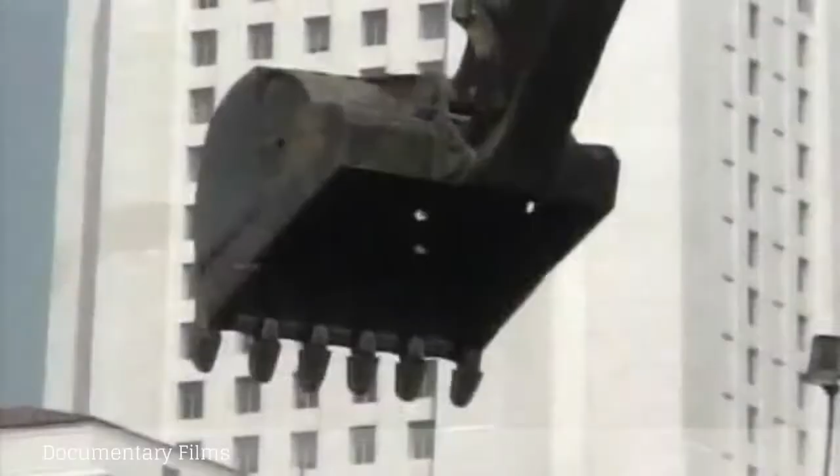For the past year, 8 months, and 20 days, the builders of the new California Department of Transportation headquarters in downtown Los Angeles have been busy pouring concrete, erecting steel, and installing walls and windows. The massive 750,000 square foot office building looks almost completed from the outside, but the structure is still pretty naked on the inside.

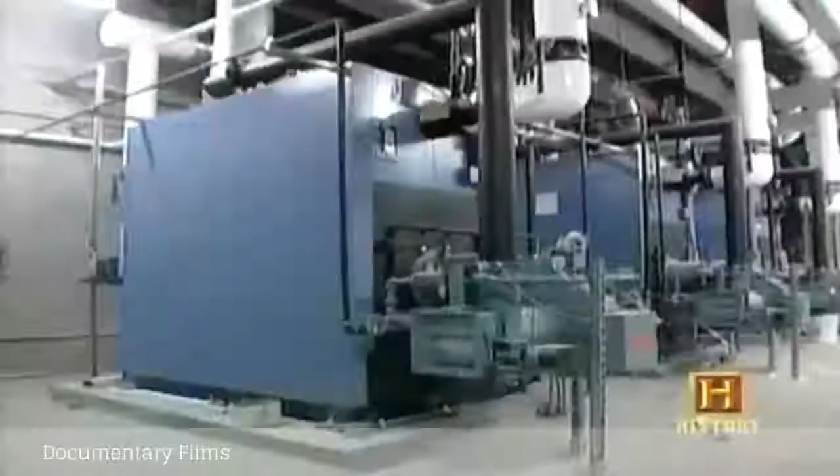It'll take another 7 months to finish installing the heating, ventilation, and air conditioning system, and elevators. These are the things that make working in a large office building possible, even bearable.

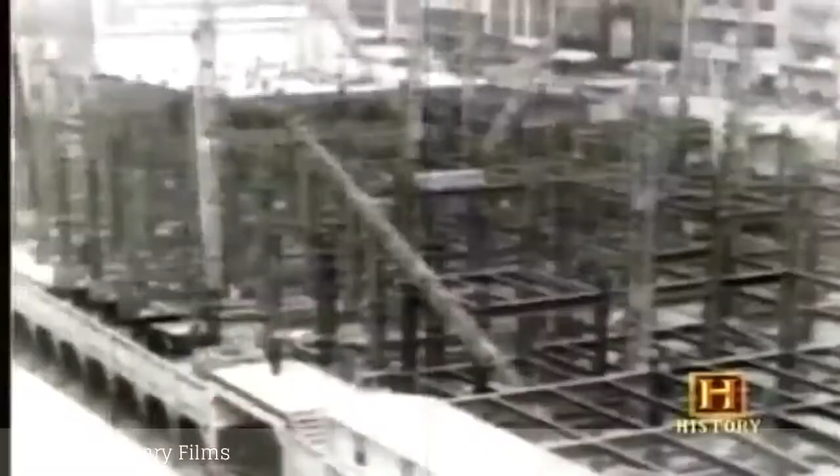Beyond the introduction of steel cage construction, no invention helped buildings, including our own, climb higher than the elevator. If we did not have passenger elevators, we don't have the modern multi-story office building, because people won't walk more than 2 or 3 floors off the street to easily reach an office.

The Caltrans building will have 19 elevators to shuttle its 2,000 employees to upper floors. Kone Incorporated will soon begin installing them. But in the meantime, Clark Construction is running a temporary man lift to move workers and materials.

At the helm, Bobby Jeffers, man lift operator extraordinaire. This is a man lift operator's life - you're always getting loaded and you're always having your ups and downs. I've been running the man lift for 25 years all over Southern California. I've built hundreds of buildings. I'm the main person that brings everybody up. The job won't run without me.

The site uses an operator for a more efficient flow of materials.

Okay, if I take you down, can I get a nice smile out of you guys? Going down, okay, you ready? Okay, hang on, hang on baby.

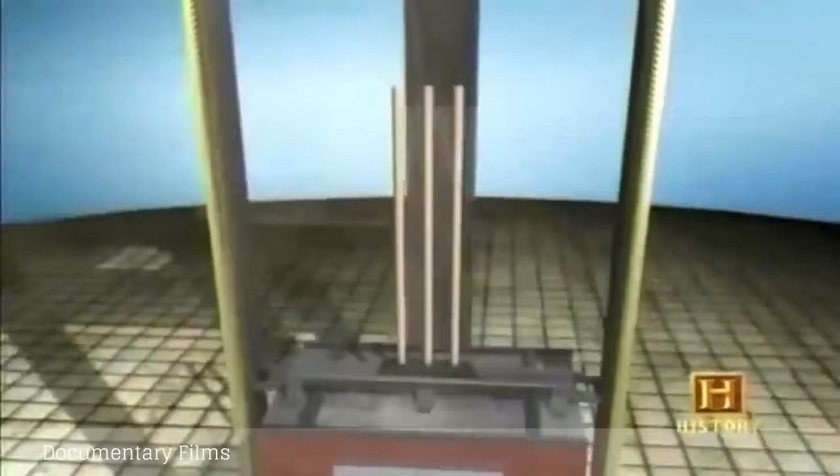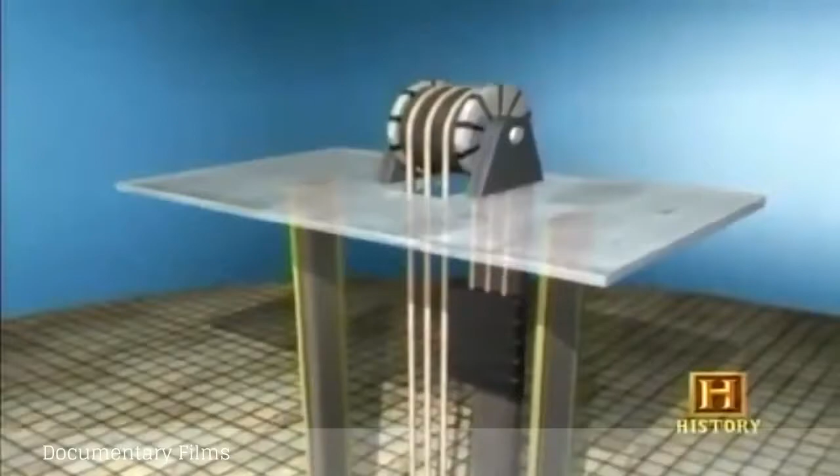Like most of the elevators used in high-rises, these are what's known as roped traction elevators. This is the elevator car. Cables are attached to the car, go up to the top of the shaft, and then over a pulley or sheave, and then back down the shaft to a set of counterweights that balance the car. Attached to the sheave is an electric motor, and when it operates, it turns the sheave or pulley, and then the car goes up or down the shaft.

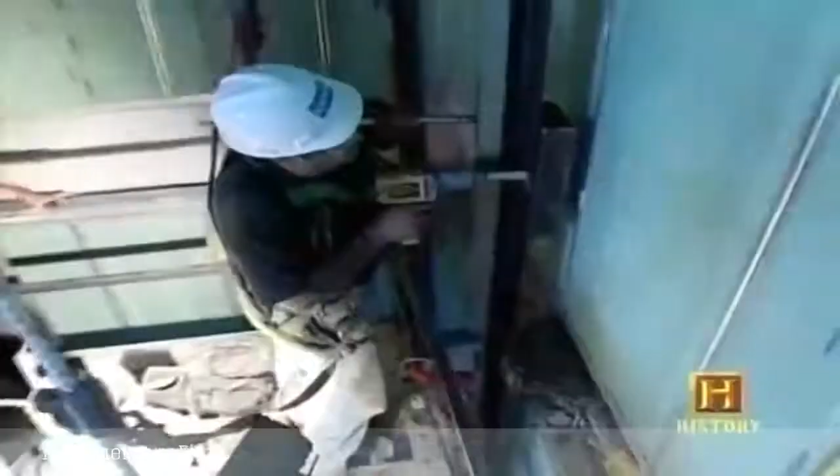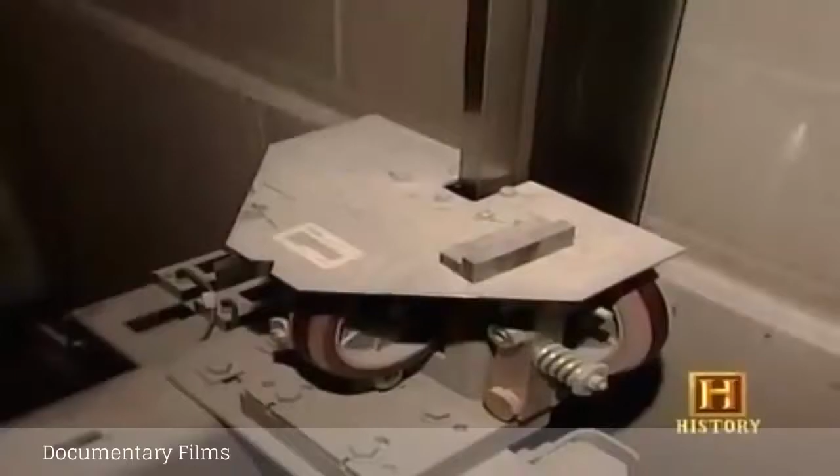Crooked in the rail. The faster the car travels, the more you'll feel it. These cars travel 500 foot a minute. It's not a real fast car, it's not real slow, it's kind of in the middle.

Electric traction elevators are the most prevalent. They're called traction elevators because it's traction between the motor sheave and the cables that lifts and lowers the car.

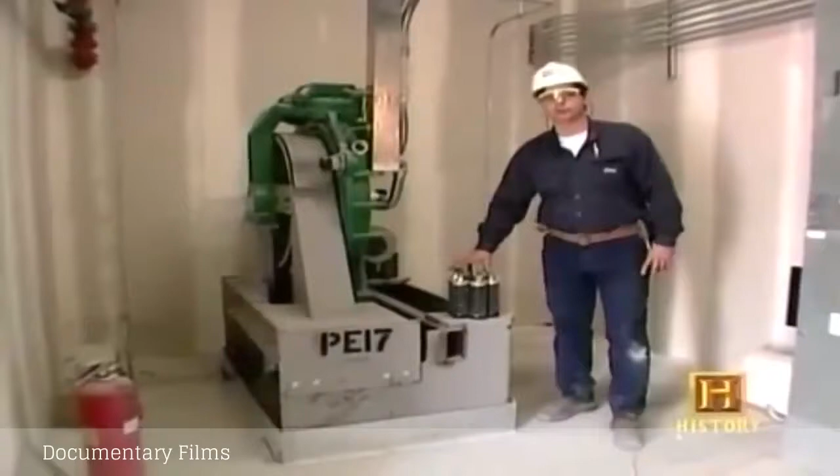Okay, we are in elevator 17 machine room. This is on top of the hoistway. This is our hoist motor, which we have the driver under here with the hoist ropes on it. As it spins, it picks the car up and down, counterweight up and down.

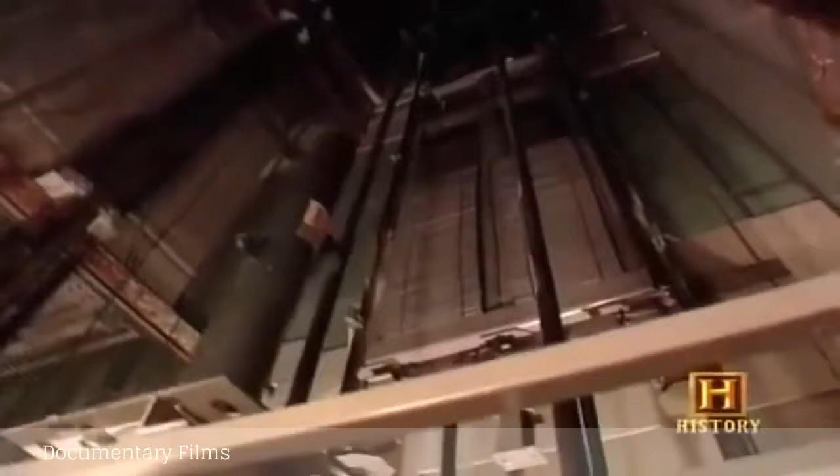The counterweight on this elevator weighs about 12,000 pounds. That's the weight of the car, plus 50% of the car filled to capacity. This helps ease the amount of work required by the hoist motor.

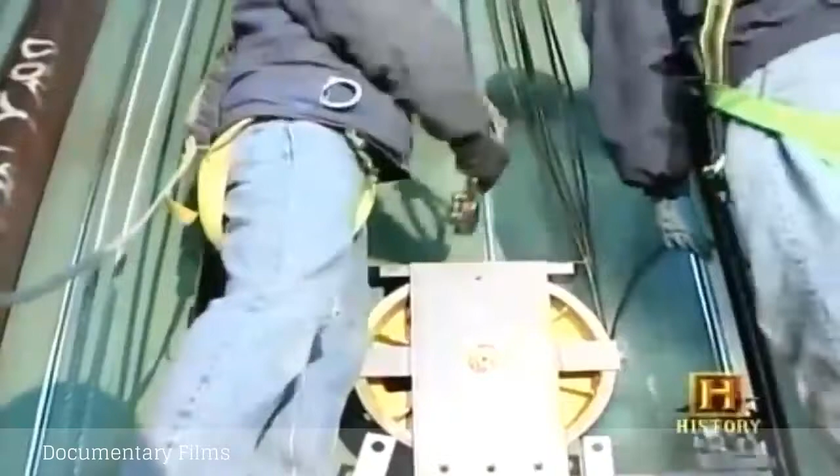Okay, right now we're roping up our cars using this elevator steel cable. We're starting out with the spools up at the very top, letting in one dead end all the way down, feeding it through our counterweight sheave. Then we're attaching it with a rope, and then they'll pull it all the way back up to the very top where they put a shackle on it and hitch it up to the hitch plate.

The Caltrans job is going pretty smoothly. Then, one of the elevators hits a bump.

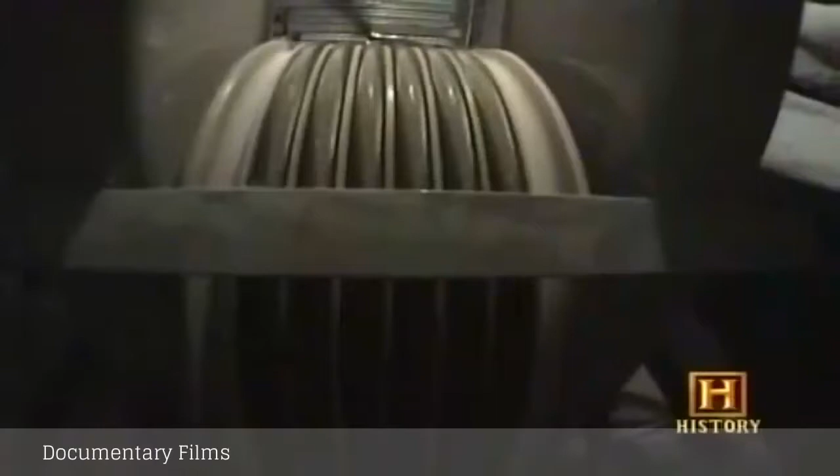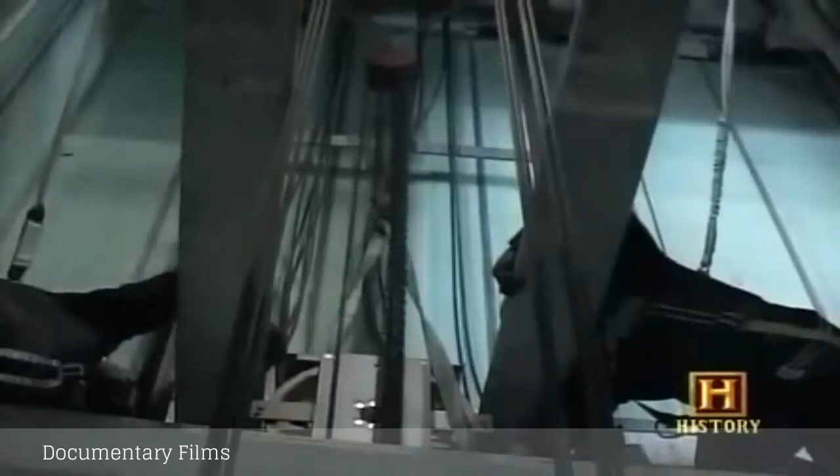After successfully roping 8 elevators, the ropes from one have unexpectedly jumped off their sheave. Dangling over an open shaft, the engineers try to sort out the tangled ropes and get them back on the sheave.

The engineers worked 2 days to sort out the problem. It was quite a project to fix it. We did have it all back up and running again. We noticed that the ropes were damaged, so actually we have started replacing them. We have to put all new ropes in the car.

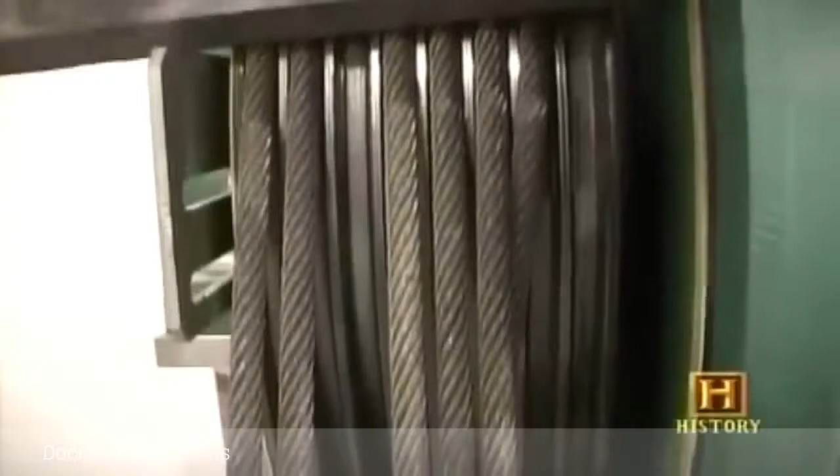Besides the hoist motor, the elevator computer, or controller, is also located in the machine room, above the shaft. This here is our controller. This is the brains of the elevator. It tells it what to do. It monitors what it is doing.

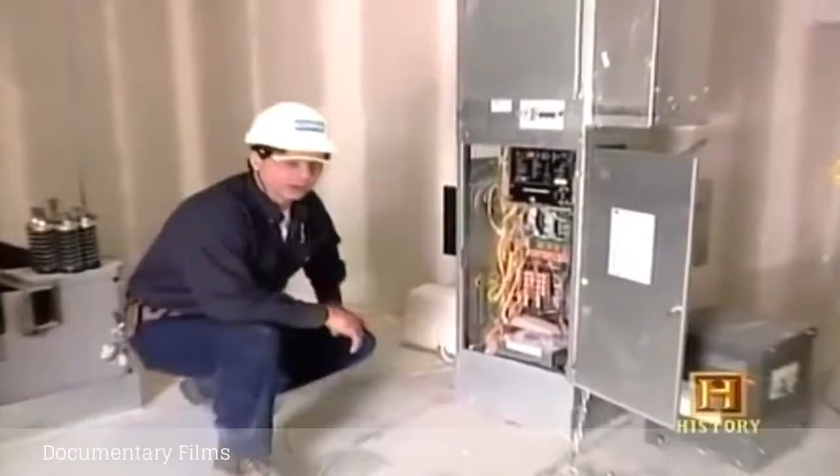The computer tells the car what floor to go to, when to open the door, and on some elevators, how much weight just stepped onto the elevator. And believe it or not, the door close button is actually not connected to the computer.

The controller also regulates the speed of the car. One of the biggest fears people have about riding in an elevator is a sudden uncontrolled free fall. It's simply the misconception we have of elevators from television programs and movies where the cables are constantly breaking and the car plummets helplessly down the shaft. That is almost impossible given modern safety devices.

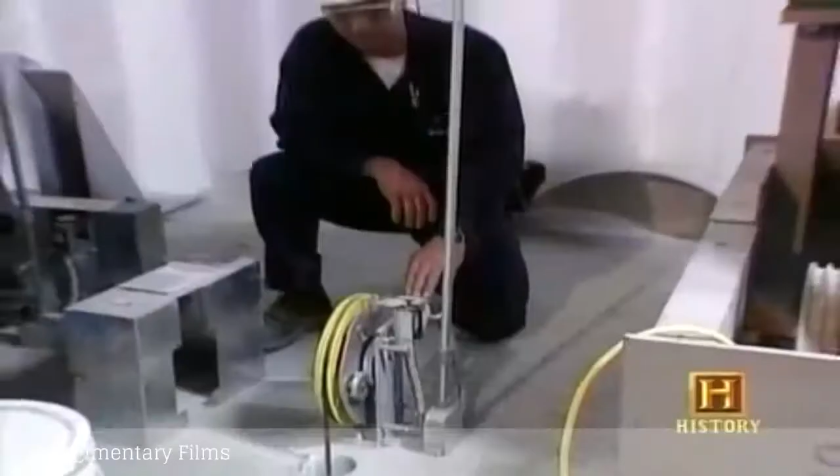One of those devices is the governor, which monitors the speed of the car. If the car were to fall and go faster than it's supposed to, it will recognize that and stop the sheave from spinning, and it will stop this cable from spinning.

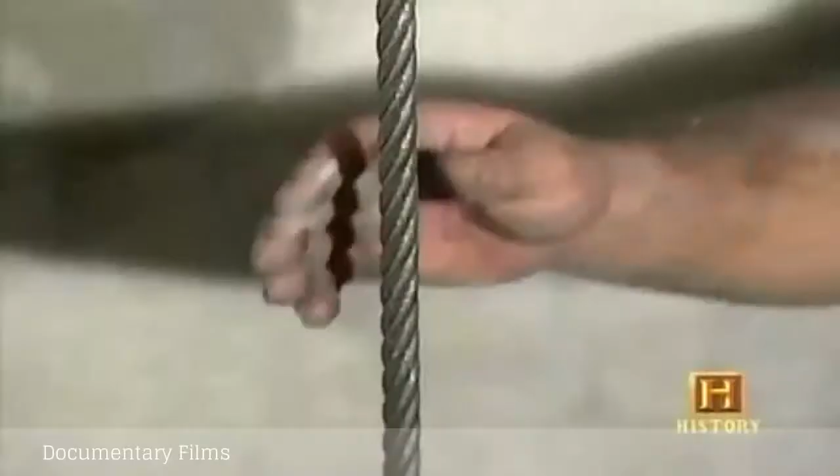There are also safety brakes under the elevator car, which clamp down on the rails to stop the car in the event of a fall. If all else fails, there's even a cushion in the bottom of the pit. So we have a hydraulic buffer here. If the elevator were to fall down the hoistway for a short distance, this hydraulic oil buffer will catch the car. This thing compresses - the faster the car comes, the faster it will stop the car.

With all the safety mechanisms, there's really no need to worry about an elevator plummeting down a shaft. But that hasn't always been the case. Elevators used to be slow and sometimes dangerous, yet luxurious. Still, this economically uplifting invention would change the rules of real estate.

Doesn't take you 8 hours to do a day's work, does it? Some people are professional man-lift drivers. I mean, you have those on every job, you know. But you can tell the lazy ones can't walk down one floor. Okay, here we go. Down one? Well, when I was your age, I used to climb the ladder barefooted, and the ladder was laced with barbed wire so I wouldn't slip.

After 25 years of ups and downs as a man-lift operator, Bobby's retiring in 7 weeks. I think Bobby's great for morale because you come in all tired and grumpy, and he'll make sure that you smile, say hello to everyone. Did you say good morning to everybody, Juanito? Good morning, everybody. Come in a bad mood, Bobby's right here, picks you up. Look happy now, smile. Let's go get him.

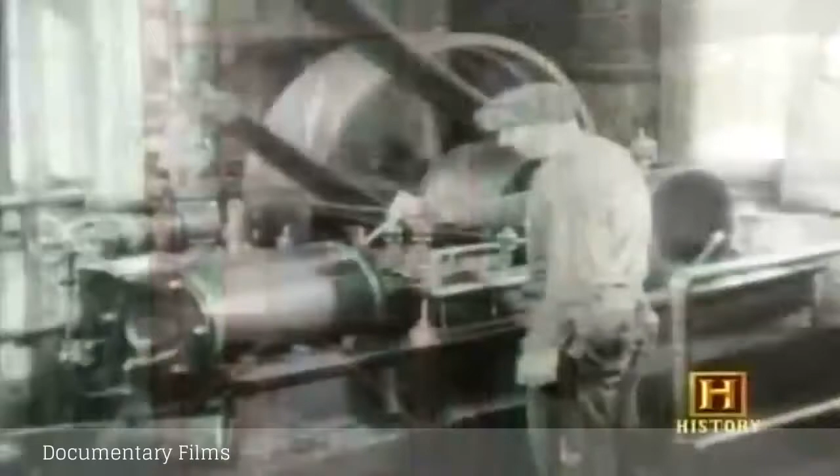Although it might seem like Bobby's been running the man lift since the elevator was invented, mechanized freight hoists actually date back to the late 1700s. English textile mills were among the first businesses to climb aboard. Steam engines or water wheels provided the lifting power to move goods and products.

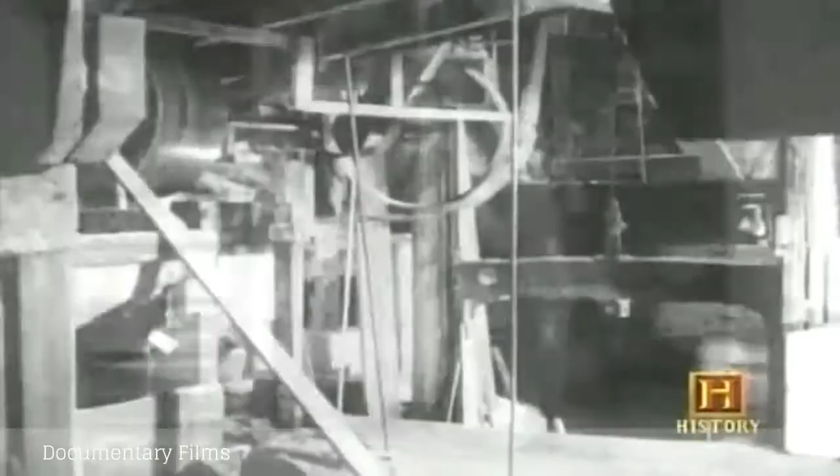The benefits of elevators were clear, but several deaths caused by freight hoist accidents proved elevators weren't yet safe for transporting passengers. Enter American inventor Elisha Graves Otis. In 1852, Otis installed the first hoist with a safety brake in a factory. The following year, Otis demonstrated his new invention to the public at the Crystal Palace Exposition in New York.

He would have the platform lifted up, and Otis would be standing on it, and then someone would cut the hoisting cable, and the car would fall, and then his improved brake would catch and stop the elevator car, and he would be safe. Spectators were astonished. The Otis safety brake consisted of 2 wrought iron catches on the car and cast iron teeth on the guide rails.

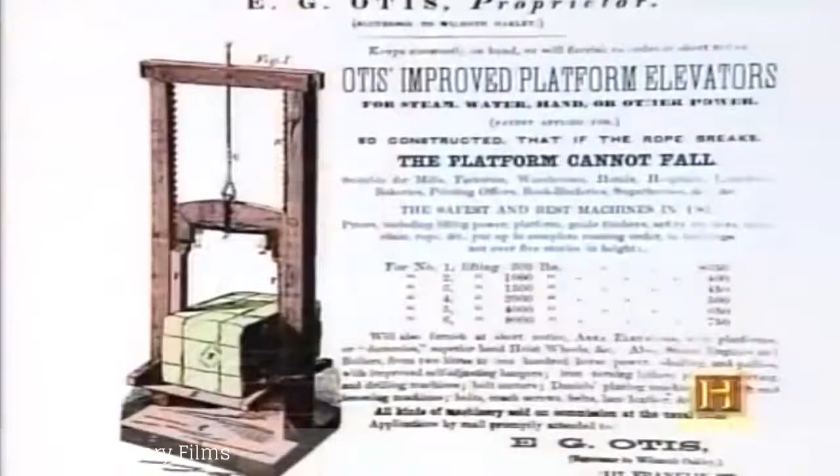If for some reason the hoist rope broke or slipped, a spring tripped the catches, forcing them into the teeth on the sides of the shaft, stopping the fall. This simple but ingenious device made elevators safer for moving passengers.

Soon, the first passenger elevators started appearing in department stores and luxury hotels. The elevator is introduced as another luxury item, literally as a movable room with upholstered seats, mirrors, chandeliers, and an operator. It was that gracious moving room that carried patrons of the hotel from floor to floor.

But the elevator quickly changed from luxury convenience to economic necessity. The new invention now made taller buildings feasible, altering the economics of real estate forever. Developers soon realized the new elevating device could also elevate office rents.

19th century New York, the primary mode of transportation is horses. Because of not only the horses but other activities, there's a lot of dirt, a lot of noise, and smells, and being above that had an obvious advantage. With an efficient means of getting people to upper stories, the top floors, which previously had been less desirable, were suddenly the most valuable space.

The first commercial office building to employ an elevator is the Equitable Building in New York City, completed in 1870. The trip from the ground floor to the 7th floor, the top story, took just under 2 minutes.

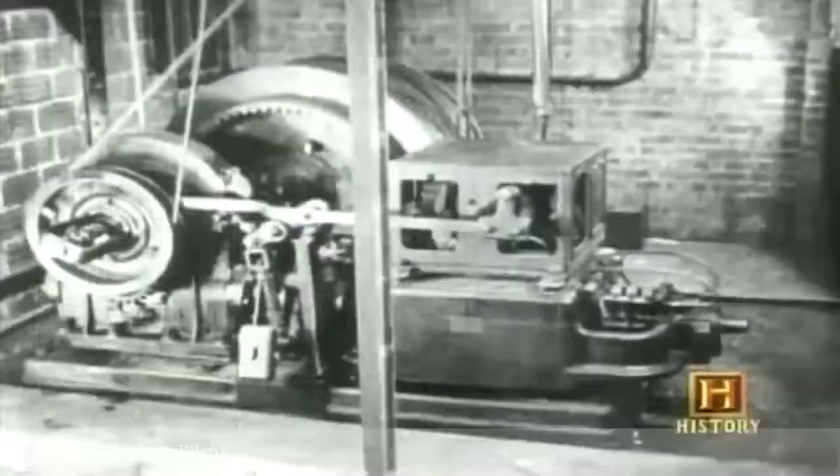Over the next 60 years, not only did elevators become faster, but safer and more reliable. Electric traction motors took the place of steam engines. The first push-button automatic elevators started appearing in the 1920s, making elevator operators obsolete.

There was a surprising amount of skepticism about operatorless elevators. People did not want to run them themselves. They viewed this as too complicated, which sounds very strange to us because they looked the same. Many elevators had buttons very similar to today. Today's elevators are a far cry from the slow, moving rooms of the past.

Elevatoring is probably the most important thing for a very tall building. If you don't get the people up there, you don't have a building.

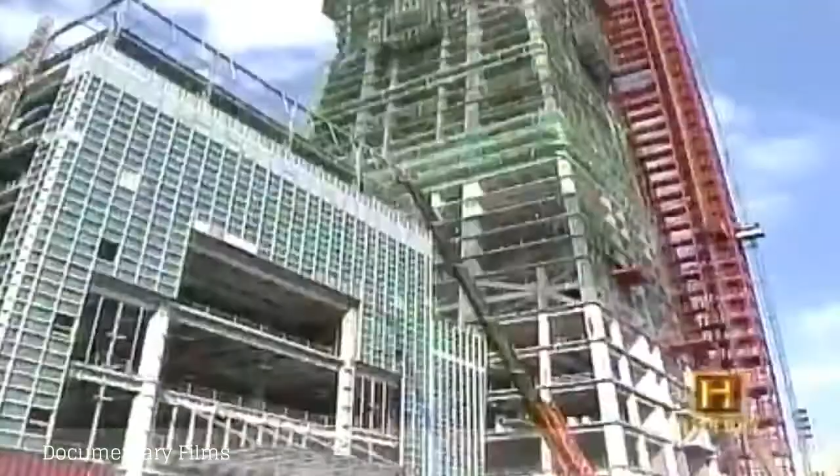Builders of the new Taipei 101 in Taiwan faced greater challenges than normal when designing the ultra-sophisticated elevator systems for the world's tallest building. In a structure this large, just getting people in, out, up, and down presents unique challenges.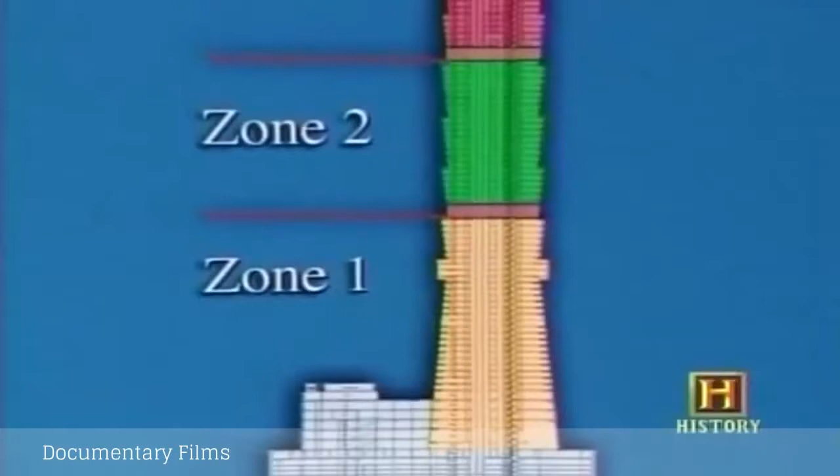We know it's important to transport these people to the floor they intend to go to in a short time. Therefore, we divided the vertical transportation system into 3 zones in order to make transportation go more smoothly.

Also, the elevators are double-deck elevators. This doubled the efficiency of vertical transportation. The Taipei 101 utilizes 61 elevators. The larger double-decker elevators can carry 62 people at a time.

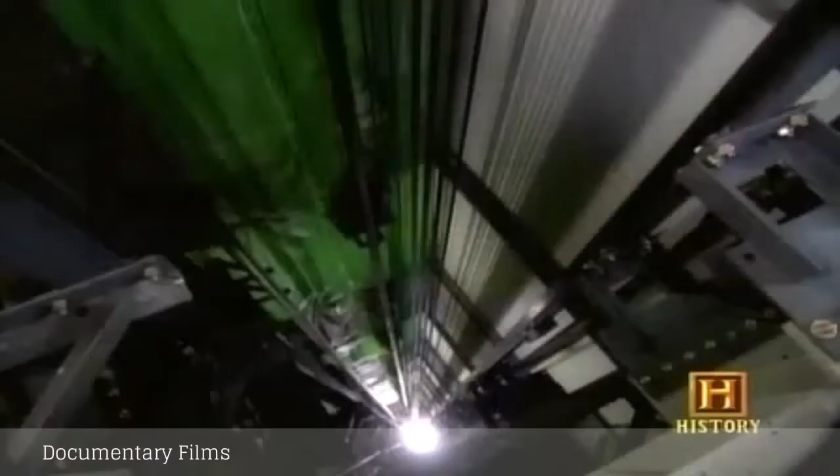We also have 2 of the world's fastest elevators. The speed of the elevator is 1,010 meters per minute, or 60 kilometers per hour. It only takes 39 seconds to bring people up to the 89th floor. At 37 miles per hour, the express elevators are the world's fastest. They're also the world's most advanced.

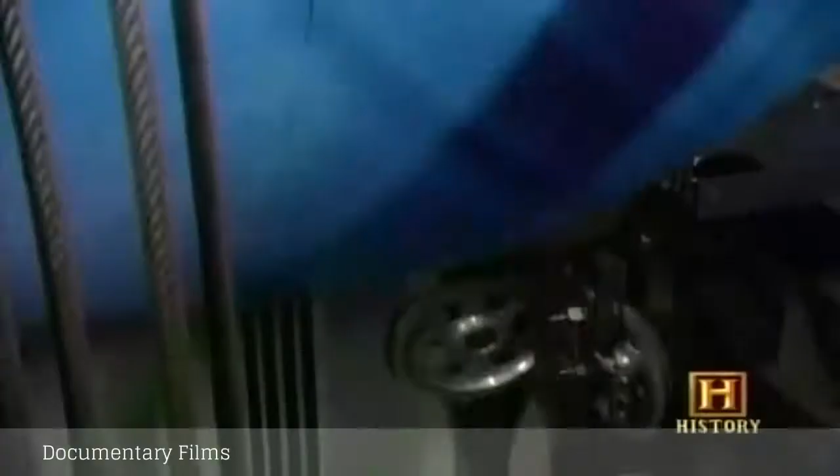The cars are streamlined to cut down on aerodynamic drag and wind noise. Toshiba Elevators of Japan spent more than a year testing various systems.

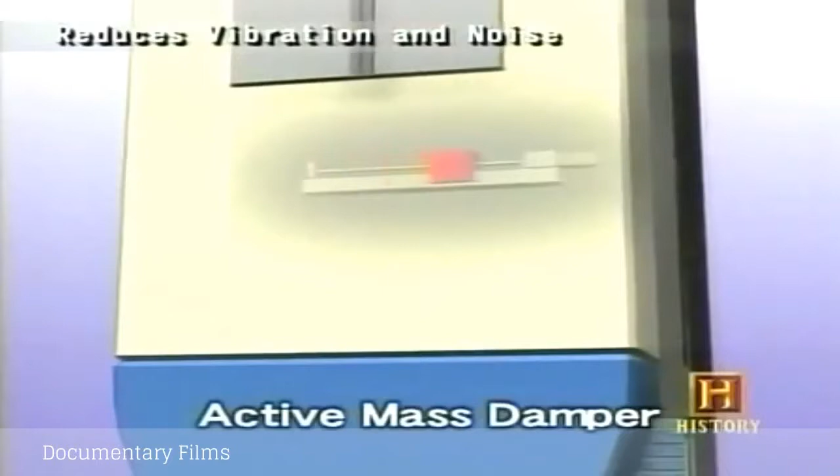First of all, we must have a very powerful motor. Secondly, we need an active damper in the cab so that it will not move around too much. Under each cab is a vibration balancing system, which uses sensors to quickly move weight back and forth to counteract vibrational forces.

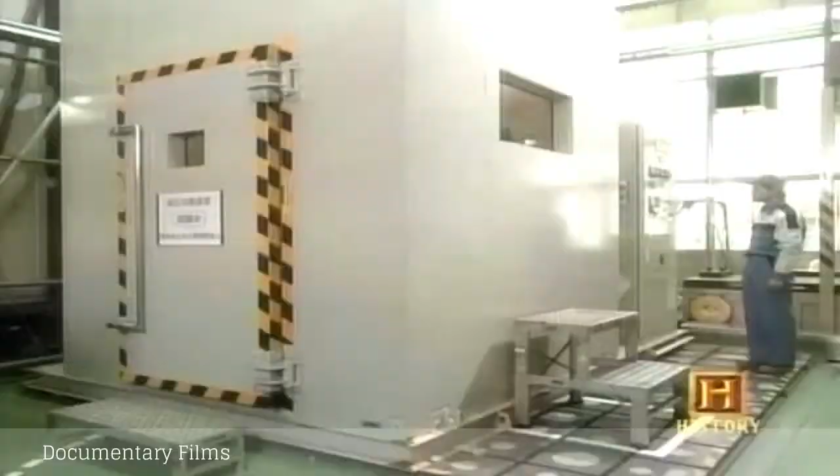And thirdly, we need to pressurize or depressurize the cabin in order to give people a more comfortable feeling on their ears. Pressure chamber testing helped determine what was comfortable.

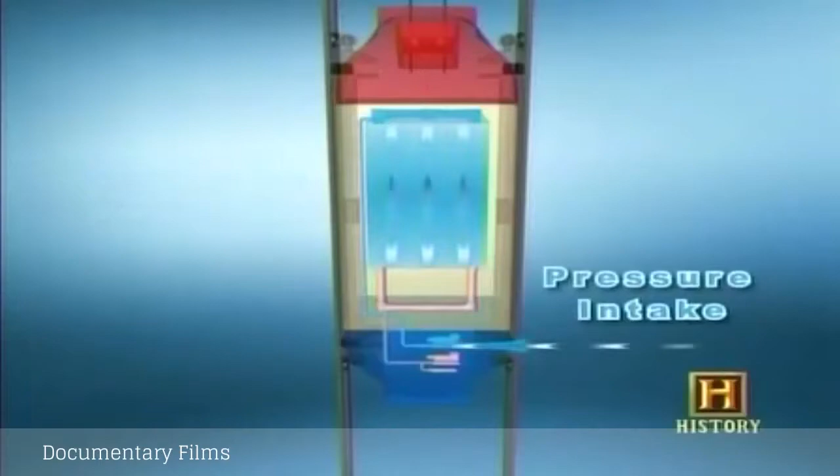The 2 express elevators move so fast, they're pressurized on ascent and depressurized on descent. To avoid a sudden change in atmospheric pressure, each cab has a high-pressure blower and exhaust release control system. Engineers on the Taipei 101 have pushed elevator technology into the stratosphere.

Back in Los Angeles, the elevator mechanics are making good progress on the Caltrans building's 19 elevators. After 4 months, the first 2 are already up and running. They make Bobby's rig obsolete.

It's last week, Friday, right? Yeah. Are you gonna miss me? Oh yeah, everybody's gonna miss you around here, Bobby. This guy's worked with me since back 20 years ago. He come in the elevator and said, hey, what?

After 42 years in construction and 25 years as a man-lift operator, Bobby's retiring. Friday will be my last day, January the 16th. 42 years, it's all been good. I've helped put a lot of buildings up. I've brought a lot of cheer and made a lot of guys feel good about themselves. And it's been great. I'm gonna miss everybody. They've all been like my second family.

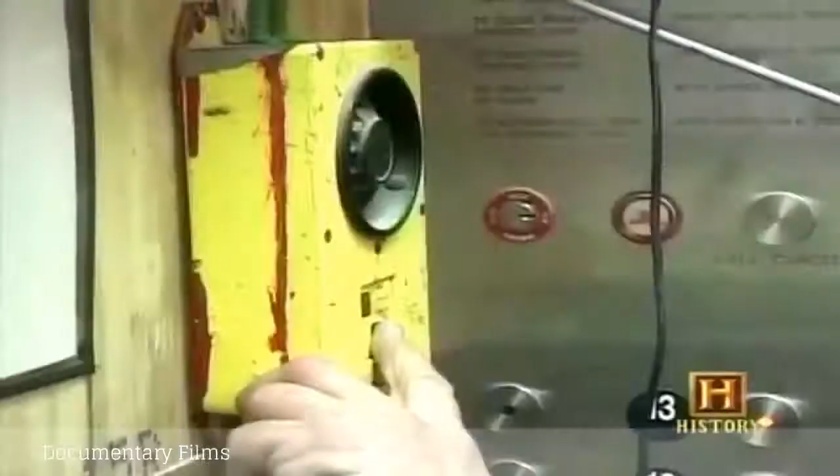I'm inside the elevator, going up and down at Caltrans headquarters building. Pick us up on the way forward. Okay, I'll get you on the rebound again. Got a man in the shade last week here, huh? I'm gonna talk to the boss, see if I can get you guys 2 days off after I leave Friday. Hey, we appreciate that. Saturday and Sunday.

When designing a building, engineers and architects spend a lot of time creating a human environment that is both comfortable and convenient. And that includes creating a safe environment.

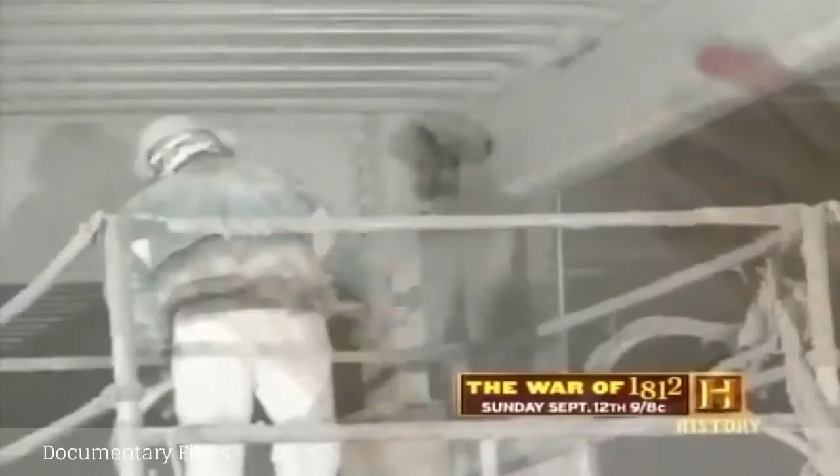One way engineers protect the structure of a building is to apply fireproofing to the steel skeleton. On the Caltrans building, fireproofers spray a coat of Monokote MK-6 on the exposed columns. It's a gypsum-based, cement-like material that goes on wet and dries to form a hard shell. In the event of a fire, the fireproofing material will help insulate the steel from heat.

A fire in a building can easily reach 2,000 degrees. Structural steel starts to lose its strength around 1,000 degrees, and therefore steel isn't actually any more fireproof than, let's say, a wood structure is. Fires have been the bane of civilization for centuries.

Fires spread easily between buildings, which were densely constructed and most often made of combustible material, such as wood. American cities were no exception.

People were very concerned about fire in the 19th century because they had the experience on more than one occasion of major cities burning down. We don't have that today, but they had the Chicago fire. New York burned twice in the 1830s and again in the 1840s. Boston had a major fire. Baltimore had a major fire.

As early as the late 18th century, architects had begun the quest for what they hoped would be a fireproof building. That's the first time we see builders trying to construct buildings without using any combustible materials. And that's what fireproof meant. It meant buildings constructed without using any combustible materials.

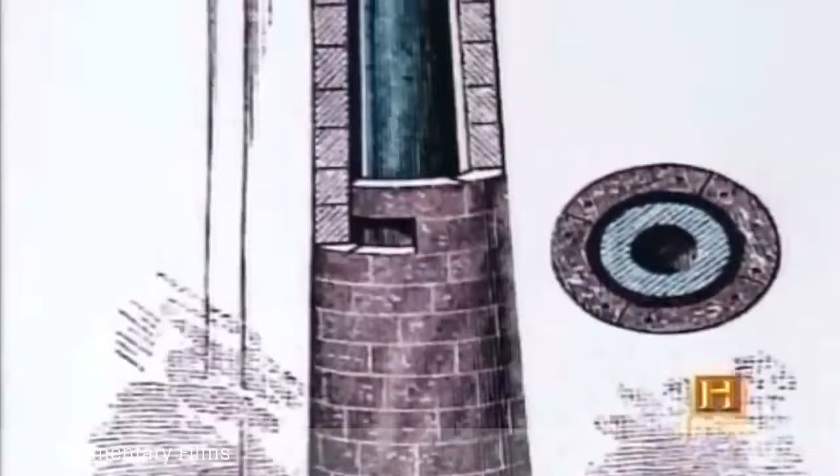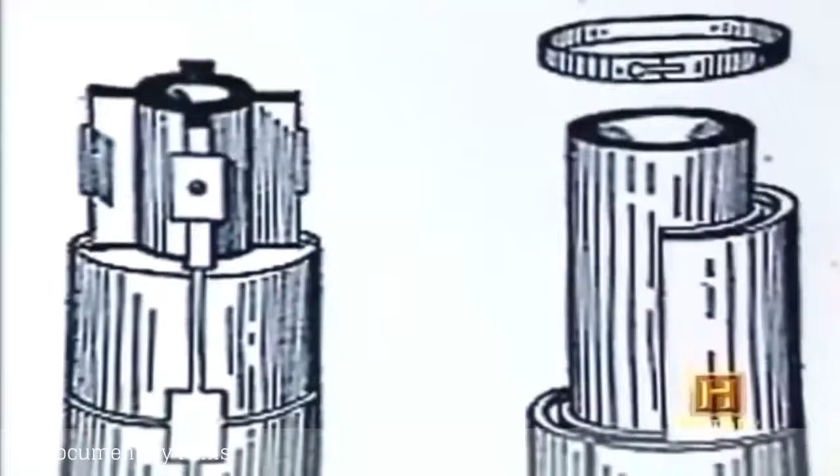Builders started encasing columns in terracotta, fired clay, to protect the structural members from heat during a fire. Later, engineers slathered plaster or concrete over wire to protect structural iron and steel members. When properly designed and implemented, these early fireproofing methods worked well.

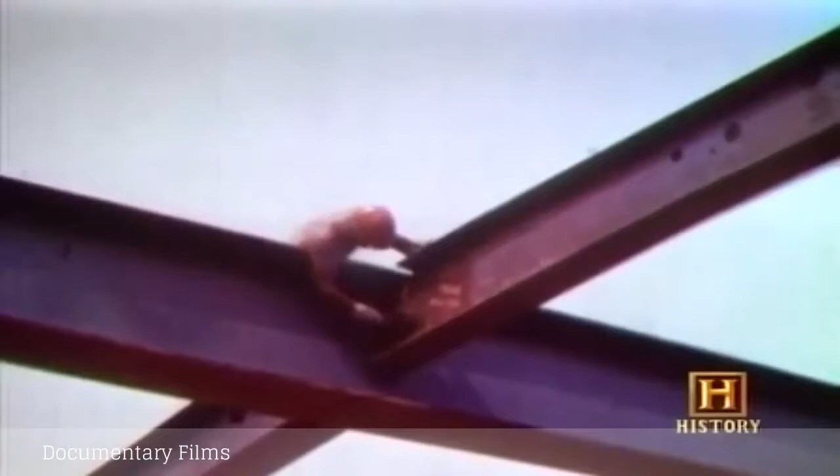It wasn't until the 1950s that the first spray-applied fireproofing was introduced. But one of the ingredients of the early spray-on fireproofing posed a hidden danger: asbestos.

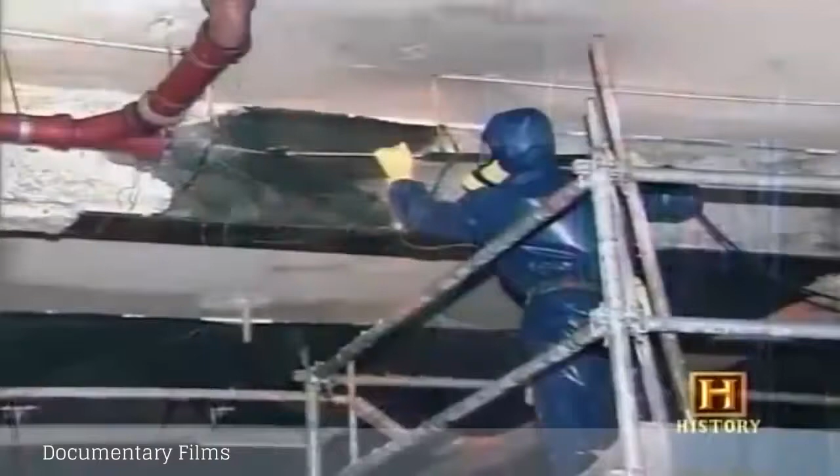Asbestos is a mineral which was used extensively in many products because of its fire-resistant qualities. It turned out that the asbestos versions of spray-on adhered to the steel very well. Asbestos is a known fireproof material, which is why so much of the early fireproofing is laden with asbestos, because it was, in the 1950s, the best material they had, and they didn't yet know about the medical problems with it. Studies showed long-term exposure to asbestos increased the risks of lung cancer.

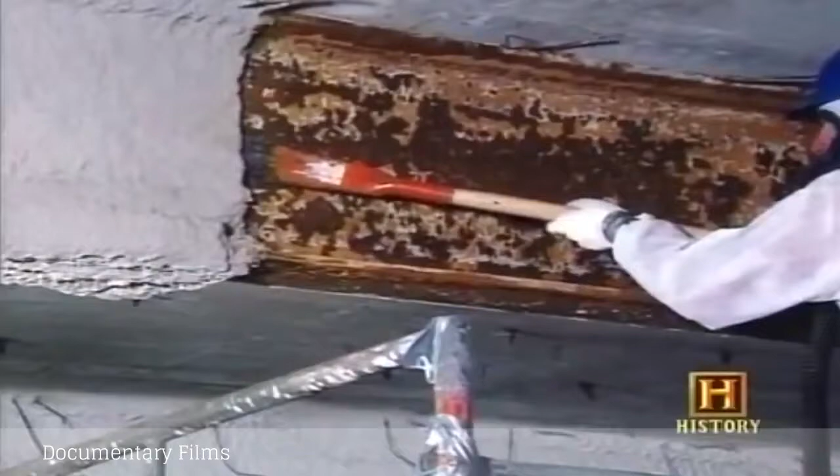In 1973, the spraying of asbestos-containing material was banned. And therefore, the fireproofing we're spraying on the Caltrans building doesn't contain any asbestos.

Fireproofing is meant to protect the structure during a fire, and as a result, save lives. But occupant safety hasn't always been the primary concern. Over the past 140 years, the emphasis on the protection of property during a fire has shifted to an interest in the preservation of life.

In the 1860s, when some kind of supplementary egress was first required in New York, most inventors came up with block and tackle things that people were supposed to lower themselves out of their windows, or chutes. So there are just dozens and dozens of patents for totally weird and ridiculous things.

External fire escapes first appeared on tall tenement buildings and factories with heavy concentrations of people inside. But one horrific fire proved how inadequate the flimsy, poorly maintained, and rarely used outside fire escapes were. The most deadly factory fire in New York history occurred at the 10-story Asch Building in Greenwich Village on March 25, 1911.

Hundreds of people, mostly immigrant women, were at work at the Triangle Shirtwaist Company, making clothing, when a fire broke out. There were so many combustible things in that building, it was probably like an explosion. It spread very quickly and people could not get out from the stairways.

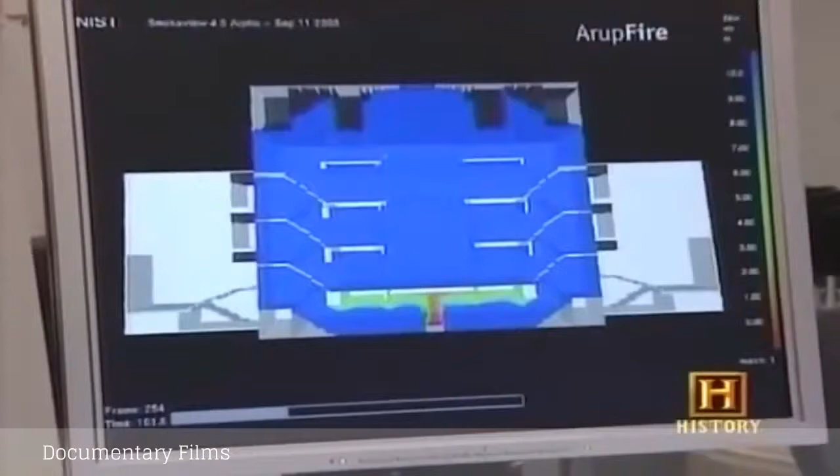It was developed by the U.S. government for modeling fire scenarios. It lets you build a building and then put a fire in, put systems in like sprinklers or smoke control, and then basically model what will happen during an emergency event and see where the smoke will go and what the temperatures will be like.

The life safety systems on the Caltrans building include 7,500 sprinkler heads, fed by 21 miles of pipe. It's not like the movies where one goes off and everything in the building starts getting flooded. Most sprinkler systems activate based on heat, so the sprinkler that actually heats up will fuse and activate, while all the sprinklers further away, if not heated, won't be pouring water down.

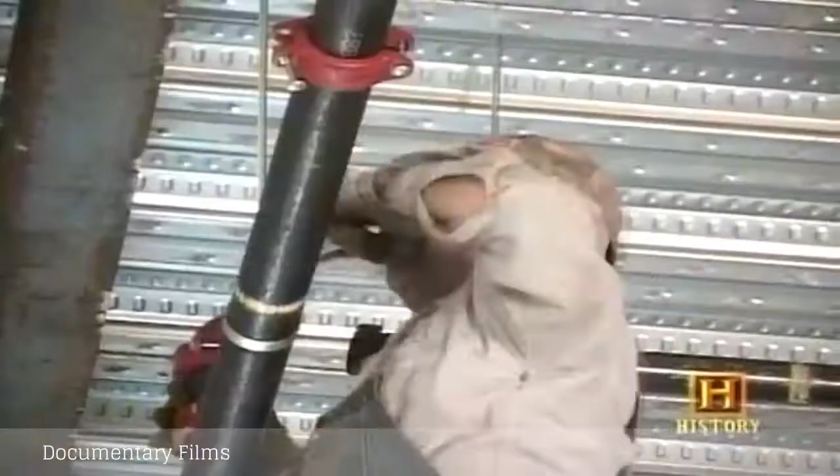But the sprinkler system isn't the only emergency system. There are also two active smoke control systems. Behind us there's stairwell pressurization, which is basically a safety in case there's a fire. It pressurizes the stairwell, keeping it locked tight so no smoke can get in while people are evacuating the building.

Another system inhibits smoke movement between floors. When smoke is detected on one floor, that floor becomes negatively pressurized relative to adjacent floors, in essence creating a pressure sandwich that isolates the smoke and heat on the fire floor.

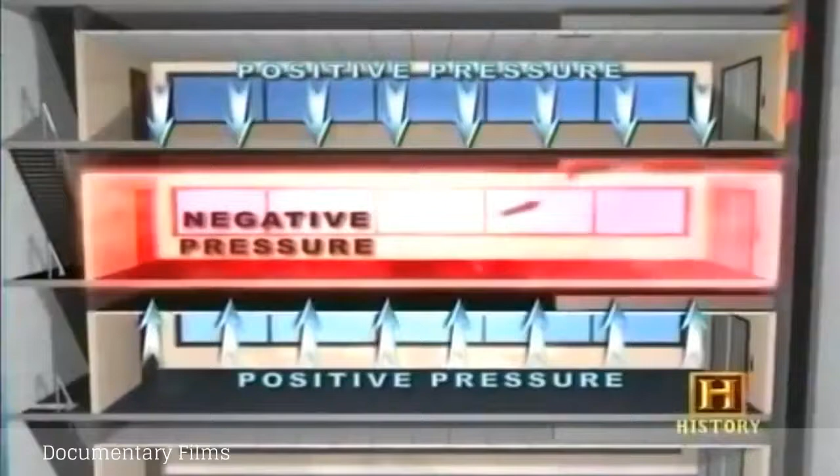Life safety engineers hope their systems never have to be used. But by applying the lessons of the past and implementing today's technology, they're helping ensure there is a tomorrow for those stuck in a building during an emergency.

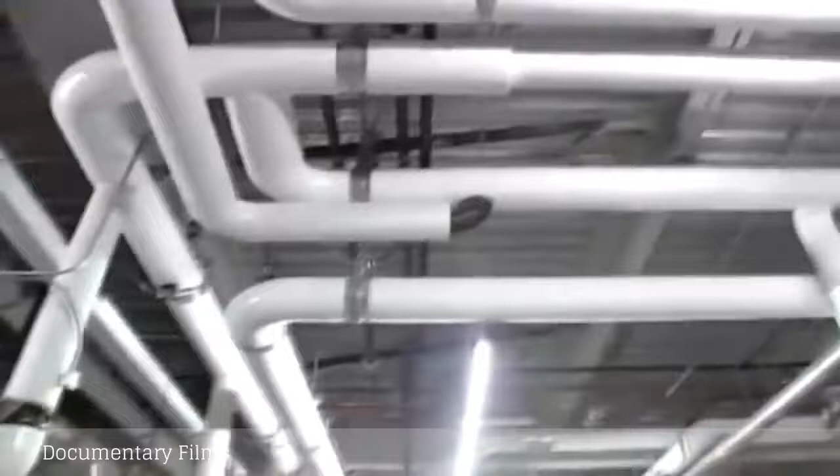One of the most sophisticated systems in any large building is the heating, ventilation, and air conditioning, or HVAC system. Keeping the 750,000 square foot Caltrans office building cool in sunny Southern California is going to be quite a chore, requiring thousands of tons of equipment and 20 miles of ductwork.

Comfort is incredibly important because when people are not comfortable, when they are in an uncomfortable environment, people are less productive. Arup is the mechanical engineering company on the Caltrans project.

They're responsible for designing the systems that keep people comfortable. Comfort is a combination of things: temperature, relative humidity, and air quality itself. These are the key components of comfort through the eyes of the mechanical building engineer.

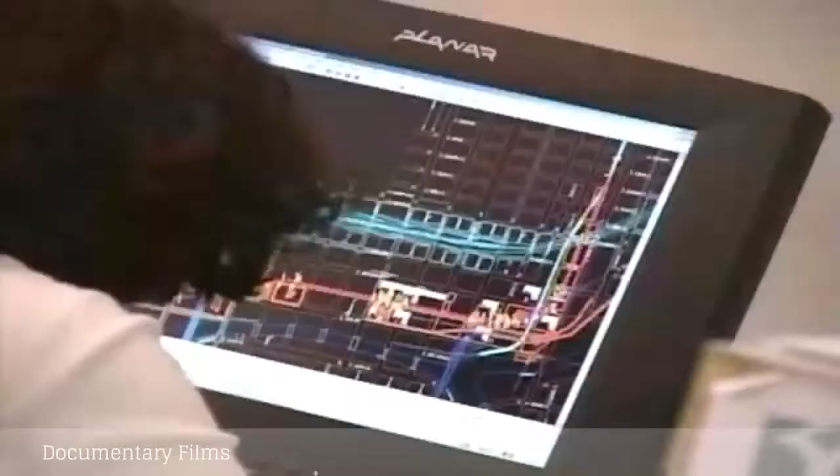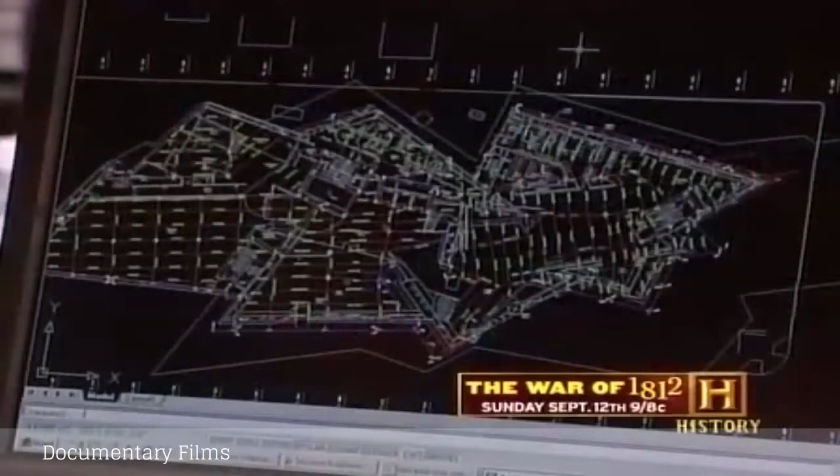Like every other party involved with the design of the building, mechanical engineers rely on computer software. It's a computer-aided drafting tool, two-dimensional. What we start with here is a typical building layout. Here is the ductwork, the air conditioning ductwork layer, and on top of that we can start to add the lights, sprinkler heads, those sorts of things.

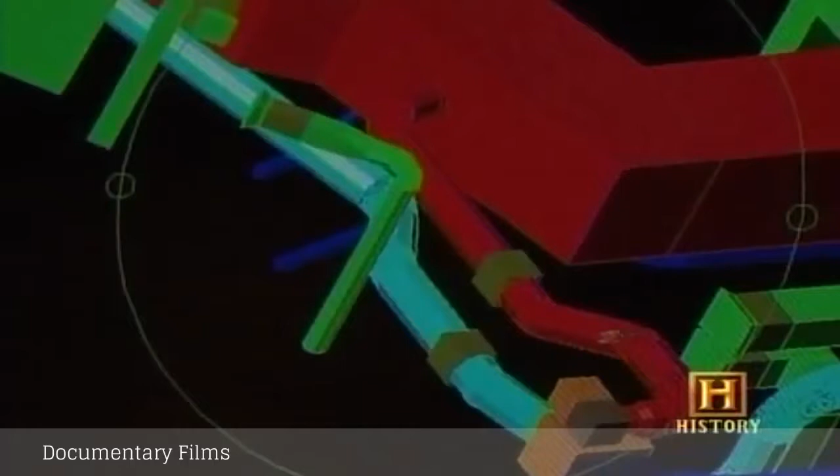For complex systems, the mechanical engineer sometimes builds a 3D model to better visualize the way all the components work together. These tools are helping mechanical engineers design even more efficient systems.

We have taken the idea of indoor environmental control from a concept that was once considered the realm of the gods, something considered impossible to do, to the point now where it has become so reliable, so quiet, so inexpensive, and so hidden that most people think heating and ventilating and air conditioning is nothing more than a thermostat on a wall.

Before the 20th century, climate control was just a dream. For thousands of years, the only product people had to keep them cool was ice. But ice was primarily a seasonal luxury.

However, by the 19th century, American entrepreneurs started harvesting ice in the winter and storing it in insulated ice houses for consumption in the summer. An iceman delivered the cold commodity door to door. But the ice was used in ice boxes for food preservation, not for room cooling.

It took the hot lead from an assassin's gun to inspire one of the first attempts at an air conditioning system.

In July of 1881, Charles Guiteau shot President James Garfield. He was shot at the railroad depot in Washington, but lingered on for weeks after that. This was August, and Washington is a notoriously hot and humid place in August. In his doctor's judgment, this was having a negative effect on any chance of him improving, and certainly they wanted to make him as comfortable as possible.

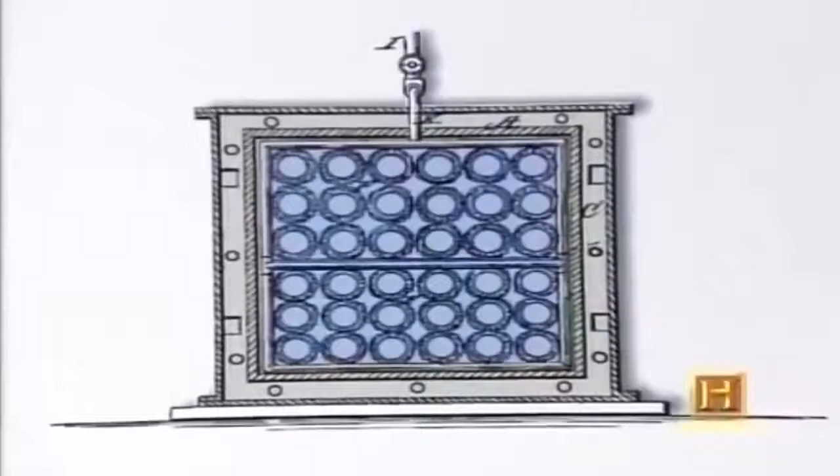At the same time, engineers tried to reduce the humidity by placing a large box filled with ice on the outflow side. Engineers believed the water vapor would condense out of the air because cold air can't hold as much moisture as warm air. They called it air cooling, but in effect they were hitting on exactly what it is that makes for modern air conditioning, that is control both humidity and temperature at the same time.

For 11 weeks, the device helped to comfort Garfield, but it wasn't enough to save him. He passed away September 19th, 1881. The problem is it required 4 tons of ice a day to operate, just a prohibitive amount, even for the White House. It wasn't until the turn of the 20th century that air conditioning as we know it was born.

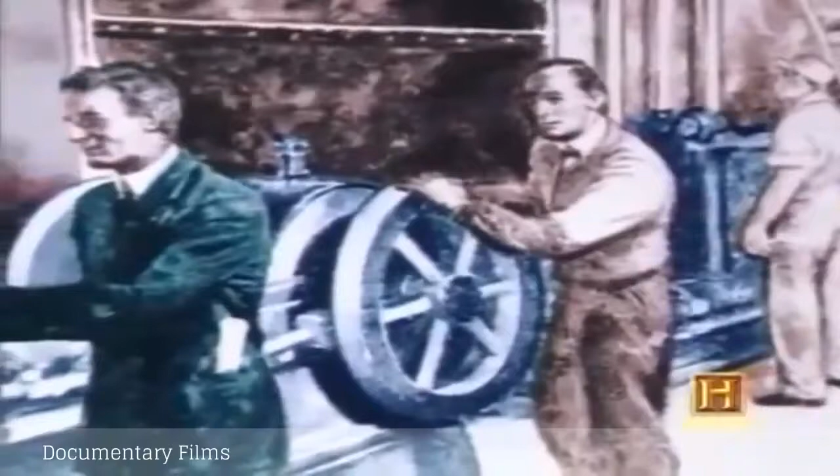Willis Carrier was asked, as an employee of the Buffalo Forge Company, to design a system which would control the humidity in the summertime at a printing plant so that the colors would properly register. What he did was to come up with a system which used a combination of cold well water as well as a mechanical refrigeration system to cool the water and then to dehumidify the air. That system that Willis Carrier developed started him on a journey which led to his ultimately being called by many people the father of air conditioning.

In 1904, Carrier applied for a patent for his apparatus for treating air. His device both cooled the air and controlled the humidity. His subsequent work formed the basis for air conditioning that is still used today.

Movie theaters were among the first large structures to adopt the new technology. However, the expense discouraged new office buildings from quickly following suit. One of the first high-rises to employ air conditioning was the 36-story Philadelphia Savings Fund Society, or PSFS building. Howe and Lescaze in Philadelphia in 1932 designed the PSFS building, which is the first modern, fully air-conditioned structure.

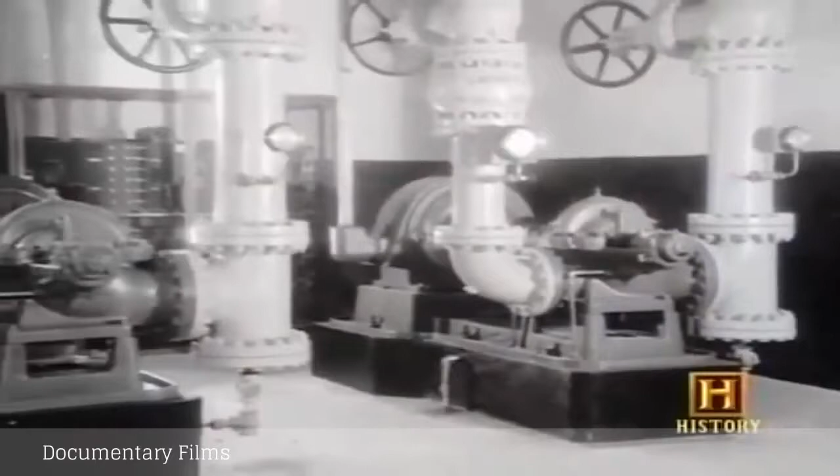Air conditioning continues to develop, but it's that moment when the tall building is free to be completely sealed up. Beyond not having operable windows, the PSFS building had dropped ceilings to conceal ductwork. It had mechanical rooms on several floors to reduce the space required for vertical ducts. Engineers even hid the building's unsightly cooling equipment behind the distinctive PSFS sign on the roof.

Even the Empire State Building, constructed just a couple of years before the PSFS building, didn't have air conditioning until 1950. The pioneering techniques first employed by the PSFS building are still being used today.

The buildings constructed after World War II presented even greater challenges for climate control engineers. The tremendous use of glass as a popular cladding made keeping interiors cool more difficult. Fortunately, the development of more efficient HVAC systems, tinted glass, and window coatings ensured occupants wouldn't bake inside the glass-encapsulated buildings.

At our building in Los Angeles, the first truckload of air conditioning equipment has arrived. The building's about to get a whole lot cooler.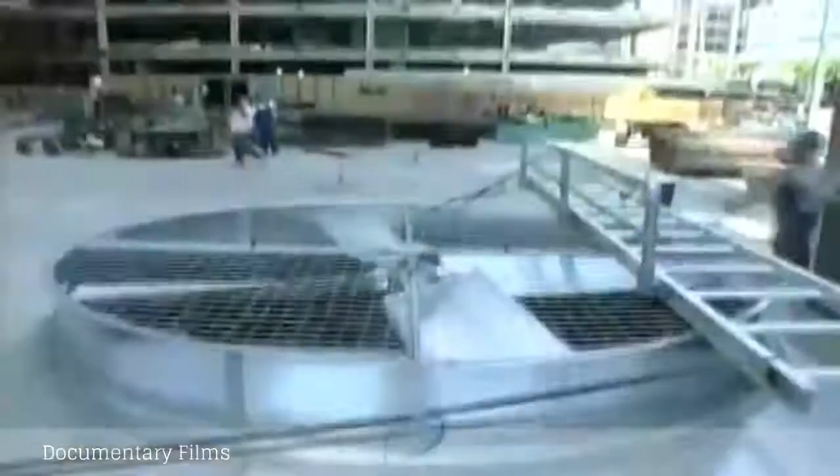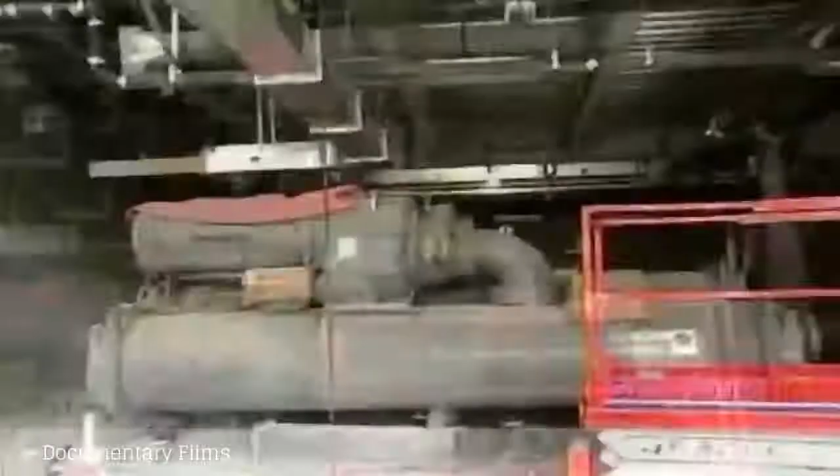At our Caltrans building, the Scott Company is the mechanical contractor responsible for installing the systems the mechanical engineer has designed. To cool the building, Scott Company will install 3 massive carrier chillers, the largest being 30,000 pounds.

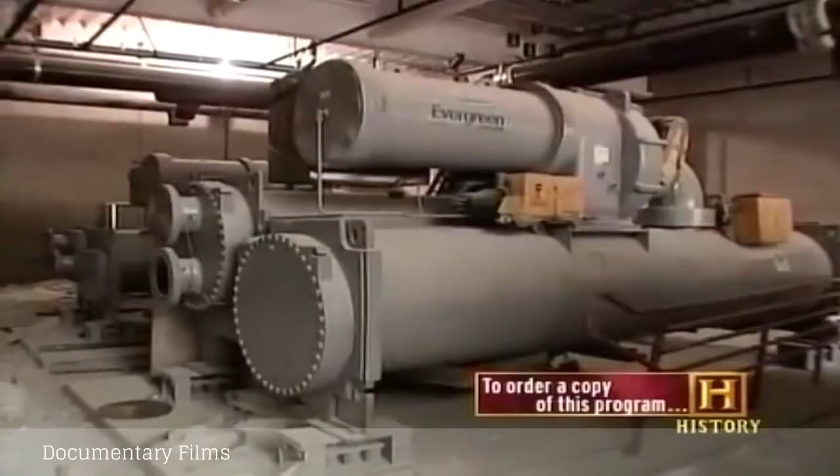This is the mechanical room. This is where, in my opinion, the heart of this building lies. These are chillers which, if you were to think about it, are giant air conditioners. All of the cooling abilities of this building basically come from these 3 units right here. The water is pumped into these chillers, is cooled, forced out to different areas of this building to keep its occupants cool.

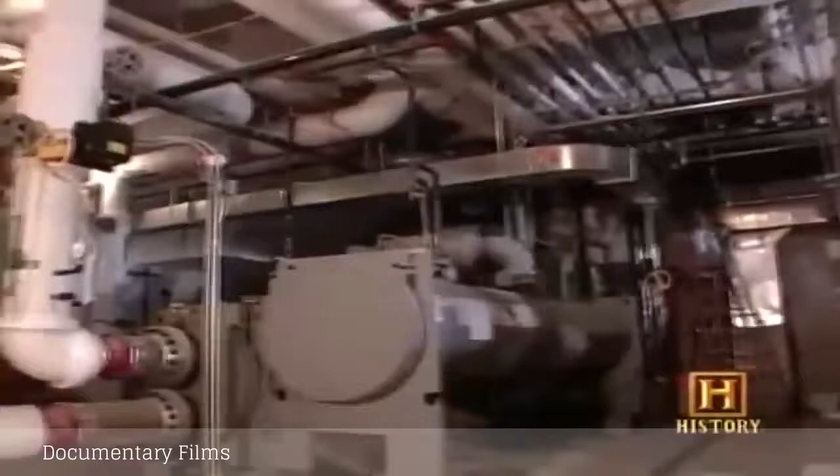This process chills water to 44 degrees. The chilled water is then pumped to air handlers.

This is the air handling unit. Basically what happens is the cooled water from the chillers or the heated water from the boilers comes into these connections, and over here we have a coil. The water runs through this coil, whether it be hot or cold water. The air, which comes from this fan, drawn through a series of filters, comes over this coil and is either heated or cooled, then goes through the building to provide either cold air or warm air for comfort.

The ductwork routes the air and takes it to where it needs to go.

Steve Hinson is handling the installation of the ductwork.

It has numbers. Each one of these pieces got a number on them, and that number correlates with the drawing, exactly where that piece goes. Scott Company will eventually run 20 miles of ducts.

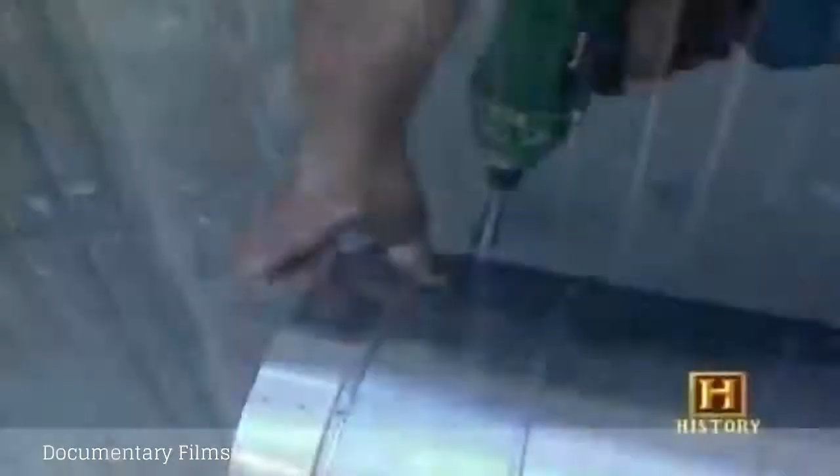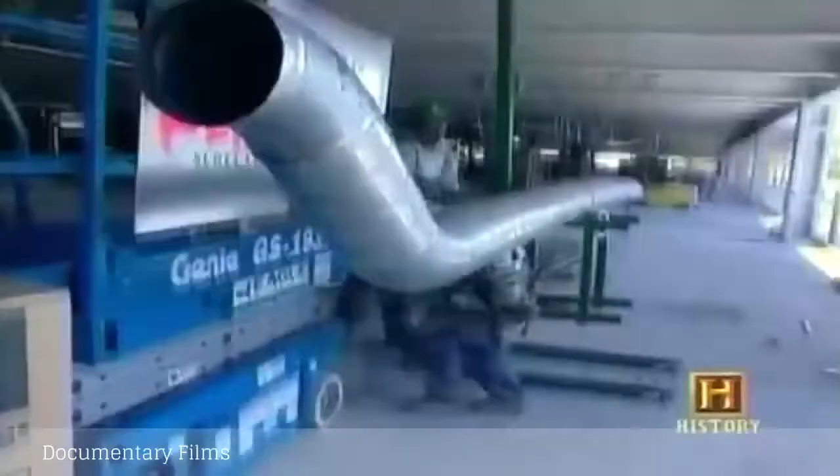This is actually the biggest job I've ever run. It's a real big job, and a lot of guys really don't think I should be running a job because of how young I am. I'm only 30. All eyes are on me right now. This job will either make me or it'll break me, and hopefully it makes me.

The 3 massive chillers that will cool the structure will also generate a tremendous amount of heat as a byproduct. So Scott Company is installing 4 cooling towers on the roof to take heat away from the chillers.

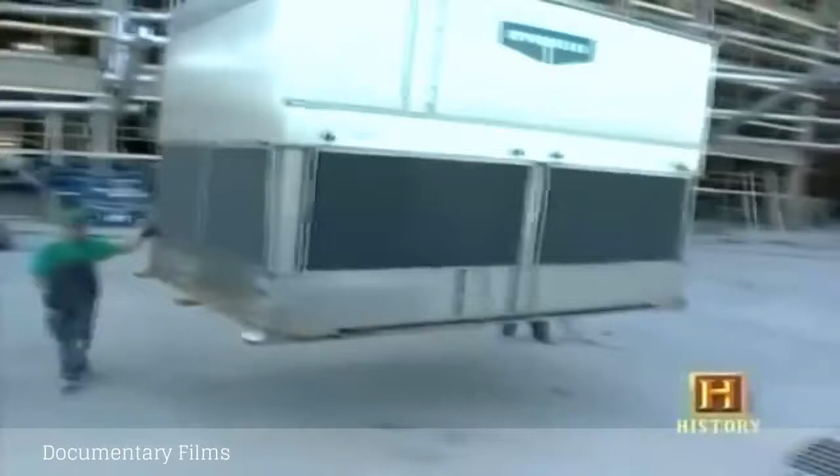Water circulates around a chiller to draw heat out of the machine. This condenser water, which is now hot, is pumped via 18-inch pipes to equipment on the roof. Okay, what I'm working on now is condenser water piping. Well, one of these 18-inch pipes is about 90 minutes each.

They're visually inspected by a state inspector, and they can also be x-rayed if it's deemed necessary.

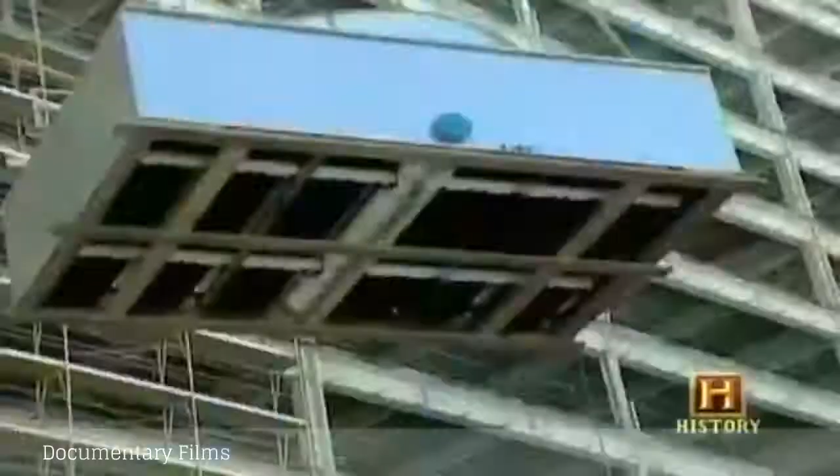Basically what we have here is the fan section of the cooling tower, or the top section. The water comes in here on this PVC and is distributed amongst these nozzles. The nozzles spray the water out in a light pattern. A fan pulls air up through the saturated baffles, cooling the water. The cooled water is then sent back down to the chillers to be recycled through the system.

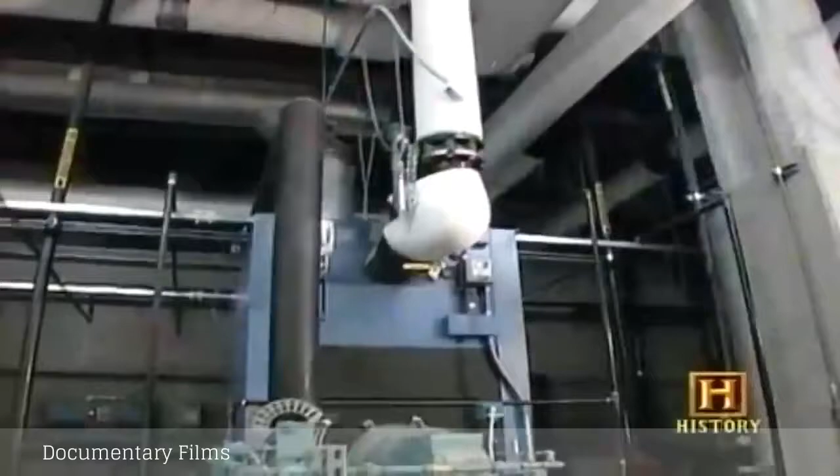To provide heating in the building, the Scott Company is installing 3 boilers. The boilers heat water, which is then pumped throughout the building to variable air volume boxes. Each VAV box services 4 or 5 offices.

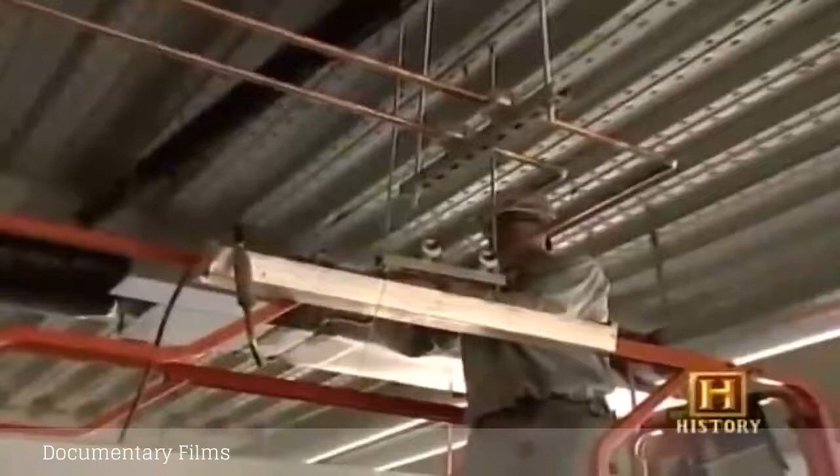Inside the VAV boxes, coils transfer the heat from the water to the air, which is then forced into the offices via the same ductwork as the air-conditioned air. But creating a comfortable environment is about more than heating and cooling. The V in HVAC stands for ventilation.

Ventilation is a very important aspect of the design of mechanical systems. Ventilation is the process through which you intentionally bring in air from the outside in order to remove or displace the pollutants that exist within a building, pollutants like carbon dioxide, ozone, formaldehyde, and other substances like that.

The air handler units bring in fresh air and mix it with return air from the building. Ductwork then carries the conditioned air into the offices.

So we finally outfitted this empty shell with elevators, cooling equipment.

We don't belong here, just throw the stuff out. Look at all that duct. All right, just throw it out.

The complex labyrinth of shafts, pipes, and ducts connecting every sector of the building like a giant web is representative of the diversity of experts it takes to create a safe, convenient, and comfortable human environment.

And one of those experts who helped get this building up is retiring today.

Have a good day there. Enjoy your ups and downs with all the guys. Take care of them, take care of the car. Bye, Bobby. Good luck. See you later.

It's a fundamental belief of ours that great buildings are made out of the unselfish collaboration of all the different parts. Watching the building go from the ground all the way to the top and meeting a bunch of good people on it, looking back, you know, to be able to tell my family, hey, you see that big tall building? Your dad worked on it. And it's exciting.